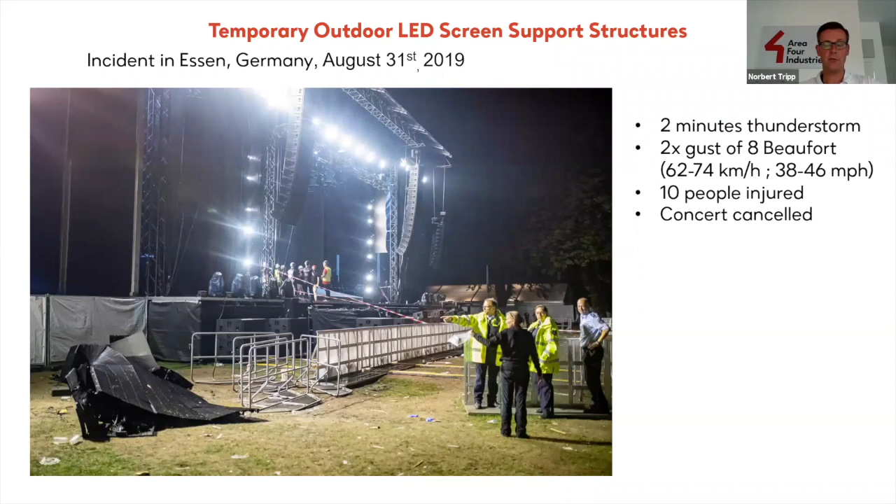So it is an up-to-date topic. What I will present or show or explain is, I will start with a few pictures about common LED screen applications, how usually in our industry LED screens are hung from supporting structures.

Secondly, I will look at the legal basis for design and use of LED screen support structures. Third, there will be some details that should be considered when you hang an LED screen. Then I will compare 2 different support structures taken from manufacturers' catalogs. And finally, I will speak about the behavior of LED screens under wind loads.

There's already the first question coming up here: as part of load calculations on the structure, should the LED screen be rigid to the structure? You can be sure this will be answered somehow, it will be discussed within this presentation. Please let me know later if your question has not been answered correctly.

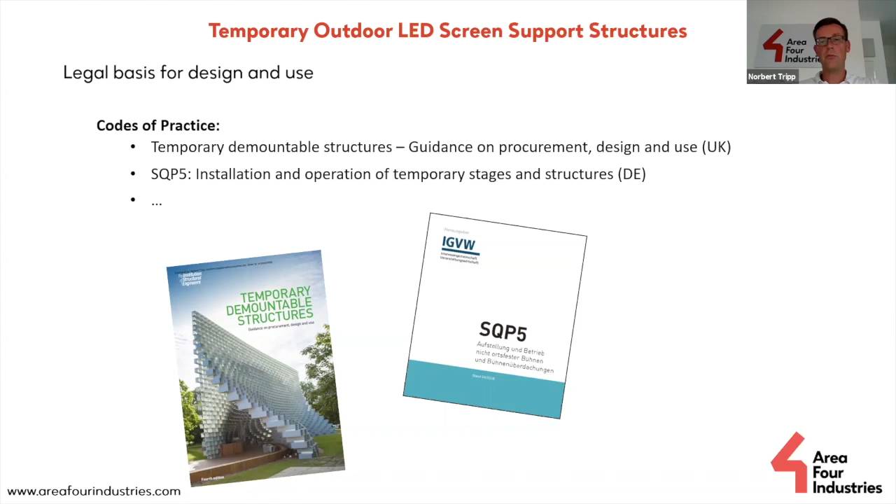The basic question is simply, what do all these rules have in common? What they have in common is that all of them speak about risk assessment or an operational management plan, risk reduction, high wind action plan, or however it's called. Basically, these rules have in common that they describe the obligation to carry out a proper risk assessment during assembly, use, and disassembly.

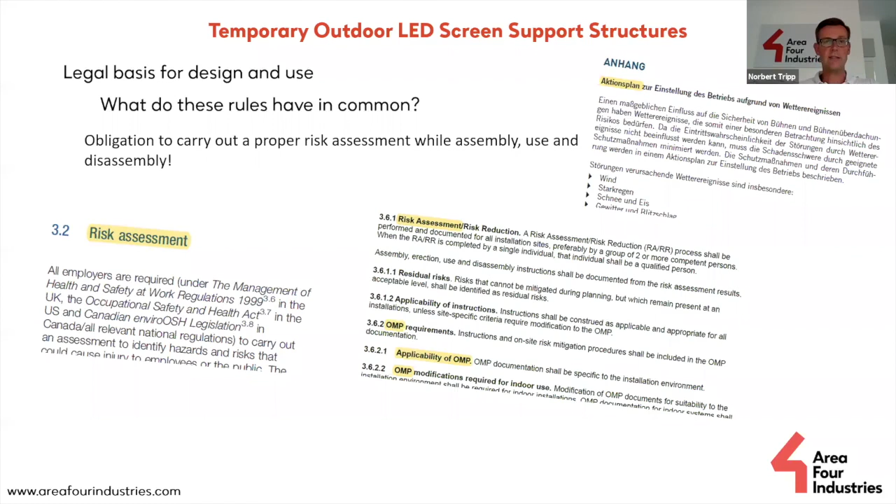And this risk assessment shall be used to create an operational management plan. Okay, it can be called operational management plan, it can be called high wind action plan, it can be called however, but what's important is that this OMP describes what can or should be done, when, how, and by whom in case of expected incidents. And with expected incidents, you can understand strong wind, strong rain, snow, or something similar.

This operational management plan should be prepared preferably by two or more competent persons, or a qualified person. If you want to have a look at who or what is competent or qualified, you can look at the American ANSI E1.21 - there it's nicely described, the difference between qualified and competent.

So the OMP sets out the responsibilities for managing the risks. That means it describes - if there is a forecast for a thunderstorm, what actions can we do? How will we do this? Who decides to start the measures, and who carries out these measures, and in which way?

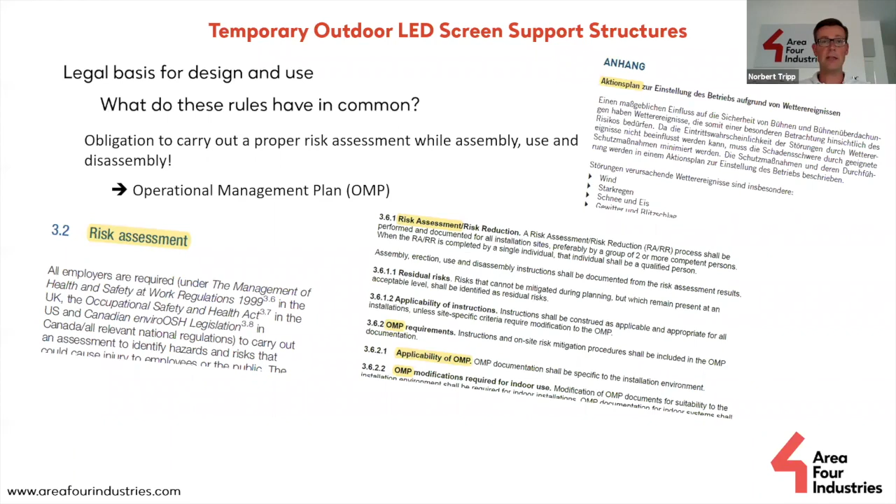Okay, but we do not have only the risk assessment and the operational management plan. Finally, or always, what you should take into account is your common sense. For common sense, I did a short Google search, and you can find thousands of nice pictures that describe common sense.

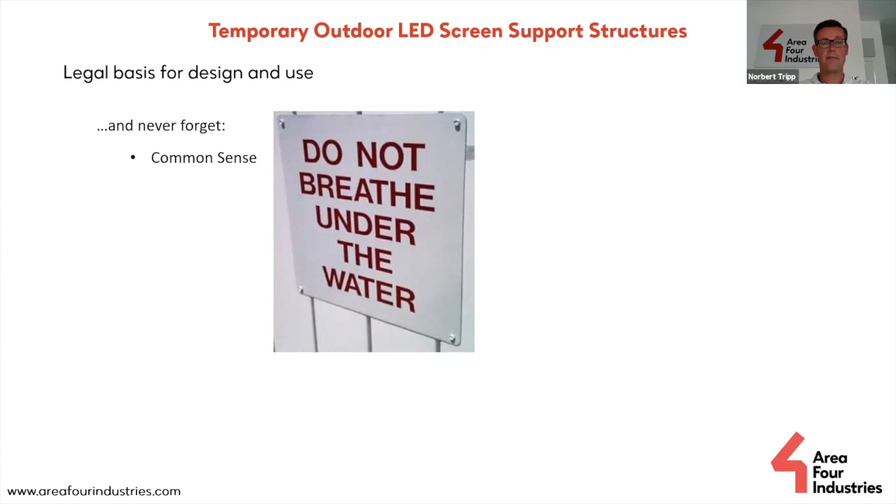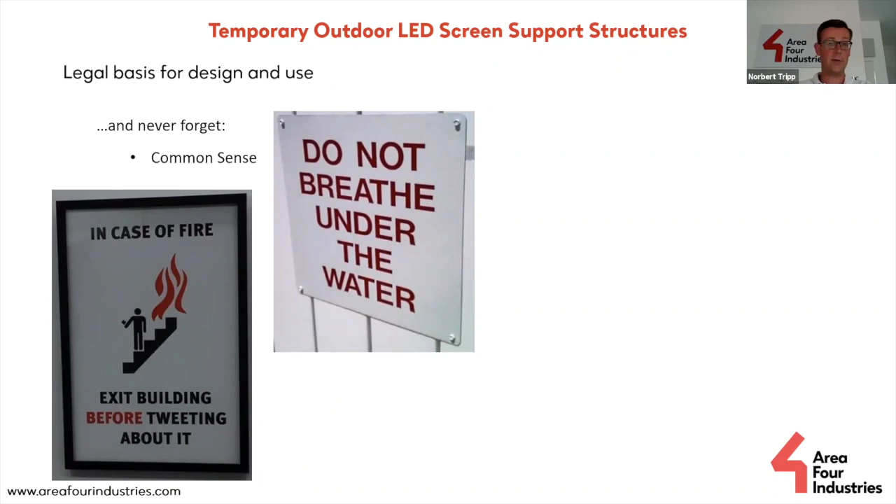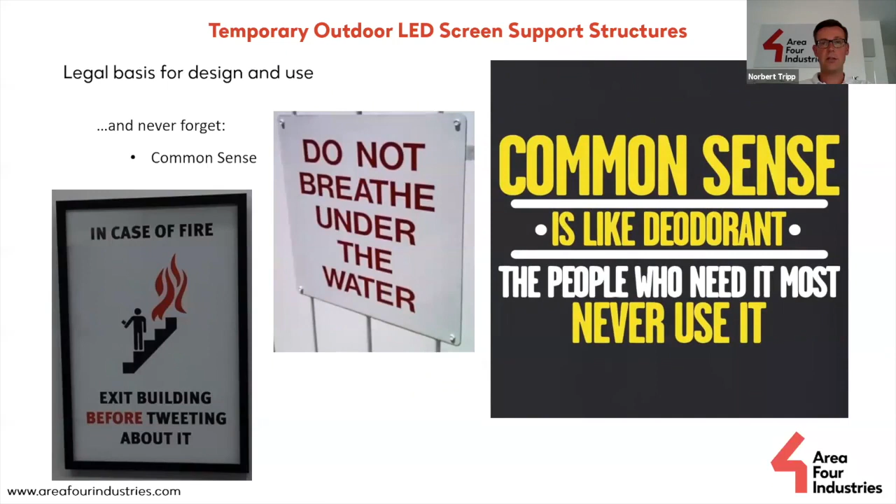My favorites have been these three: of course, in a pool you should not breathe underwater. When you are in a building which is burning, you should first exit the building before tweeting about it. And finally, my favorite one: common sense is like deodorant, the people who need it most never use it. So use your deodorant and use your common sense.

Now let's have a look at the third topic: what you should consider when you hang an LED screen.

Hopefully, the structure you usually build where you hang your screen has been approved somehow by a structural engineer up front. And if you intend to hang your screen on the bottom front main chord, which is the easiest way, you should tell your engineer that you do so.

Otherwise, because this kind of load application is not in the center line, not in the center of gravity of the truss, it is eccentric. So the load is applied with a lever arm to the center of gravity, and a force multiplied with a lever arm results in a bending moment. In this case, it's a torquing moment for the truss.

If you do not inform your structural engineer that you will hang the screen like this, I usually expect that it's hung properly in the center of gravity, and I would not consider any torquing moments or torquing forces on the truss.

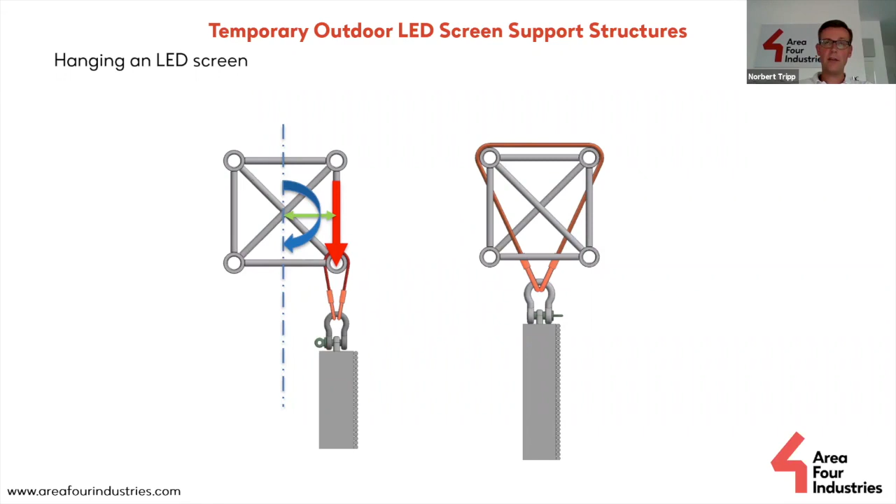And if, for example, the truss already has a utilization close to the limit concerning shear forces, this additional torquing moment will create an additional load on the diagonals, which might cause a failure of the structure. So it's always recommended to hang the screen in the center of gravity, because then you do not have the lever arm, and where there's no lever arm, there's no torquing moment.

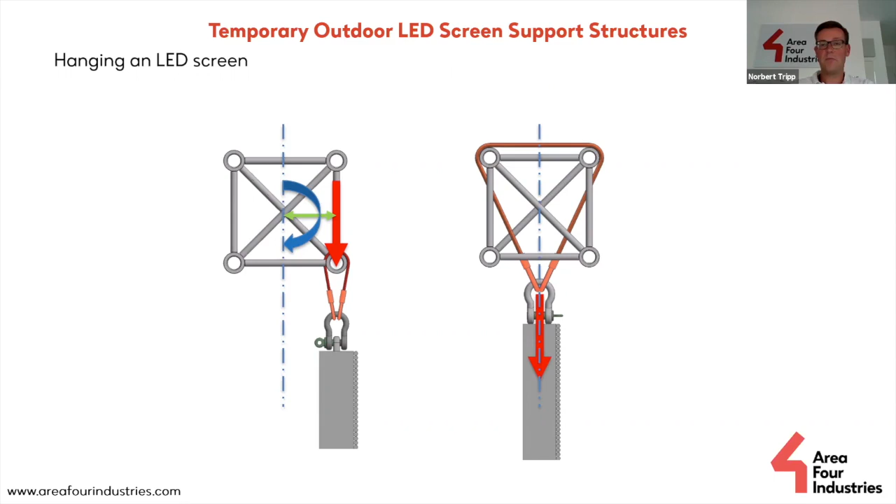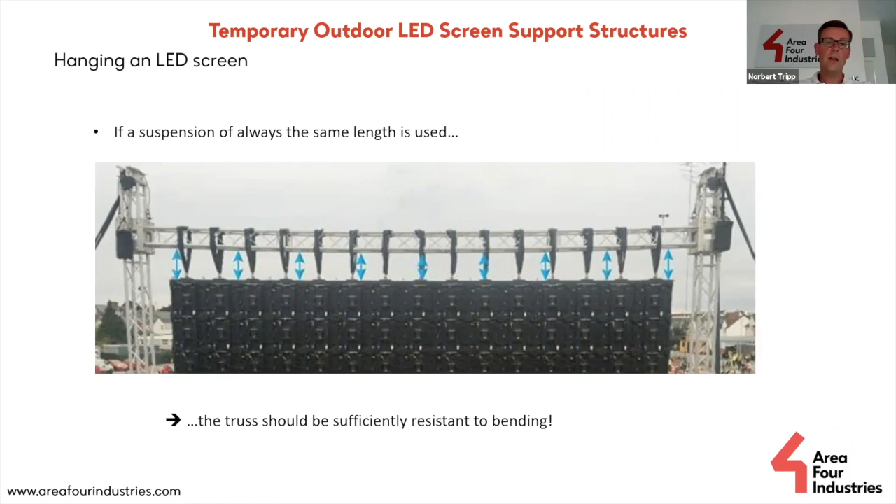On the other hand, if your truss is quite flexible and shows this behavior, then you should use an adjustable suspension. In this case, it has been different electric chain hoists, but here again, if you do not control these chain hoists by use of load cells, you cannot guarantee that the panel-to-panel connections right and left are not loaded too much.

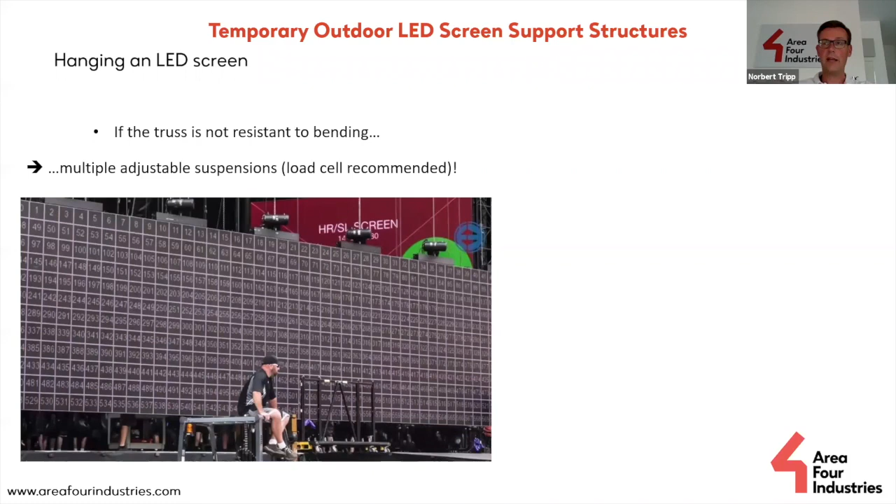Another option is to use an intermediate truss, which is hung on only two hanging points. This picture you have already seen at the very beginning of this webinar.

This intermediate truss is supported by 2 chain hoists, and they are not at the very beginning and the end of the black truss. It is somewhere between the third points to quarter points. This way, you can harmonize the deflection between the hanging points with the deflection on the free cantilever, and this reduces the overall deflection and reduces the stresses on the panel-to-panel connection.

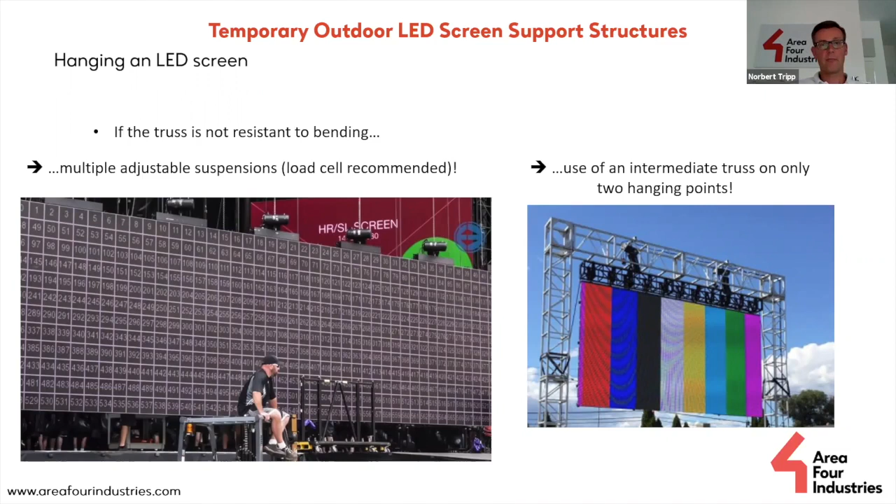Okay. I'm happy not to get any questions on what I've talked about. Otherwise, please just let me know.

Let's have a look at the next topic: when you compare information provided by different manufacturers and compare the load capacities of supporting structures. Here I have 2 different examples. The very first is from the Czech company Milos, the so-called structure LSG3, which you can find in the catalog. The LSG3 is for LED screens 10 by 6 meters in size.

The span is about 11 meters. The overall height is as well around 11 meters. The horizontal top truss is a 1 meter high aluminum truss. The towers are 52 centimeter square trusses. Having a look in the catalog, you can find the information that the load capacity is 3.2 tons or 7,000 pounds, with a small star describing that you can have a look in the structural report, how and where exactly the load shall be introduced in the structure.

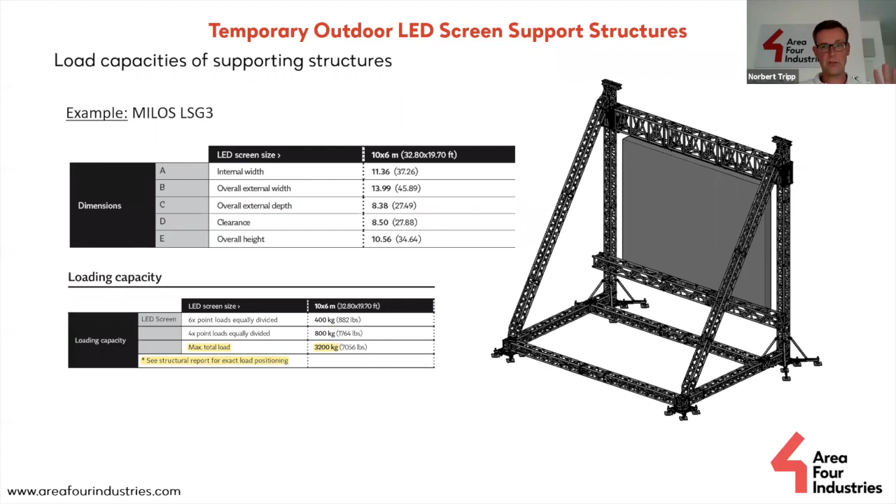So far, so good. Then we can compare this structure with another one from the Italian brand Litec. The description S11H9 describes the height and the span, which is more or less comparable to the Milos structure. And the towers are as well 52 centimeters square. The main truss is RL105, which is comparable to the Milos RTTH. So speaking about the truss dimensions, the structure dimensions, it's absolutely comparable, but the difference is that here the information about the uniformly distributed load shall be in total 6 tons.

Here we had 3.2 tons, and here 6 tons. Why? Where's the difference? You can see here as well, the description of UDL has a small star, which gives a reference to the small print information. And there you can find that the indicative loading data is for use in environments without wind. Of course, when you do not have to consider wind loads, a comparable truss has way more reserves for vertical loads. So if you compare the manufacturer information, you should have a look or ask for all the details to be able to compare apples with apples and not apples with pears.

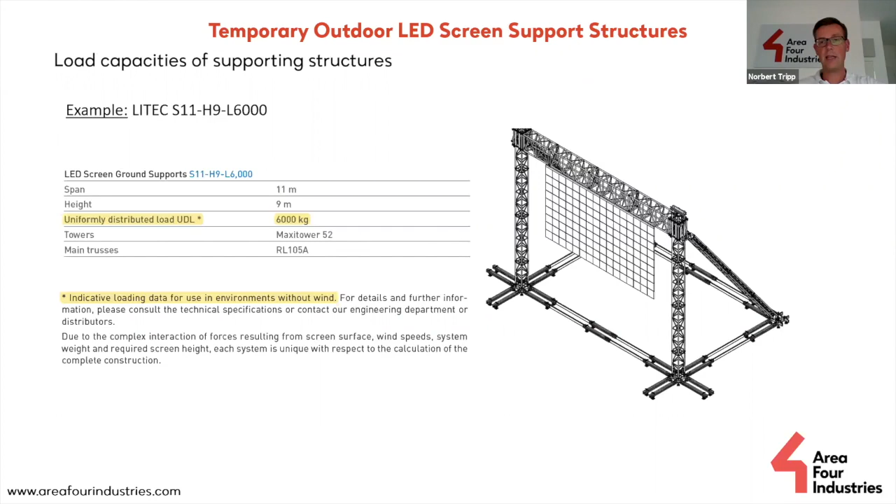Important to mention here is that the airplane creates a nearly constant wind speed. But in reality, natural wind is never constant. It has peaks due to gusts of wind. But first, let's have a look. What does it mean when the screen is swinging on a structure? Of course, it can damage the supporting structure.

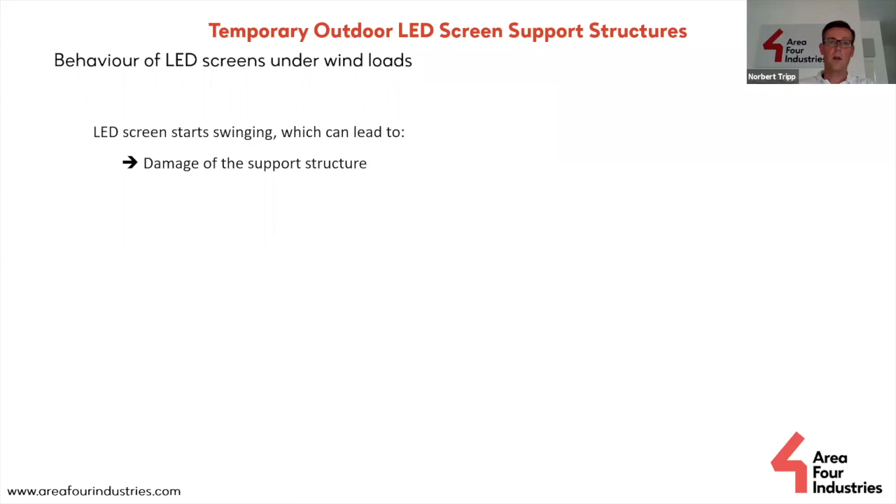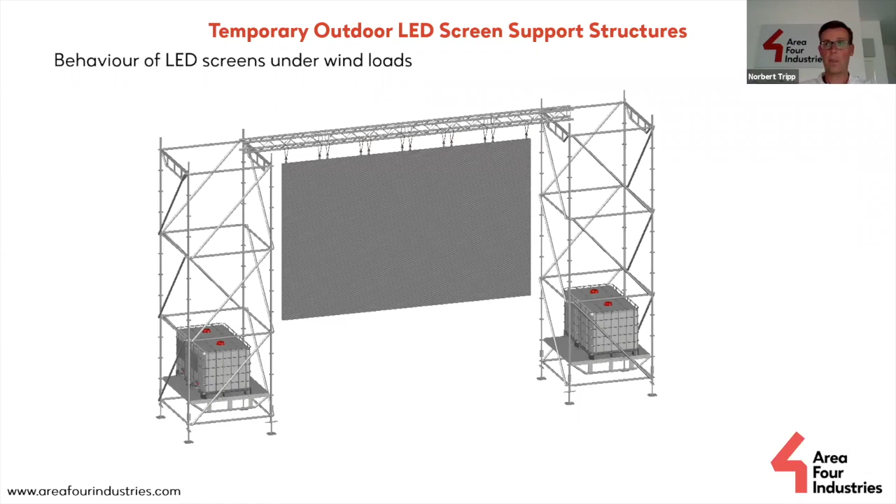Okay, what else happens when the screen is swinging? It changes the center of gravity of the entire structure. Entire structure means in this case the center of gravity of the supporting structure, including the self-weight of the screen. To visualize this, I have created a model, 2 scaffold towers with a cross truss on top from which the screen is hanging. So far, so good, quite easy, quite simple.

Having a look from the side, the center of gravity of the ballast is, in this case, in the center of the structure. The center of gravity of the screen is as well in the center of the structure. When talking about an overturning point on the rear side, when the wind is blowing from the right, what acts against overturning of the entire structure is the load of the screen plus the force of the ballast multiplied with half of the structure's depth. The force multiplied with the cantilever is the bending moment, or a moment. In this case, the self-weight of the screen and the structure, including the ballast, creates a resisting moment.

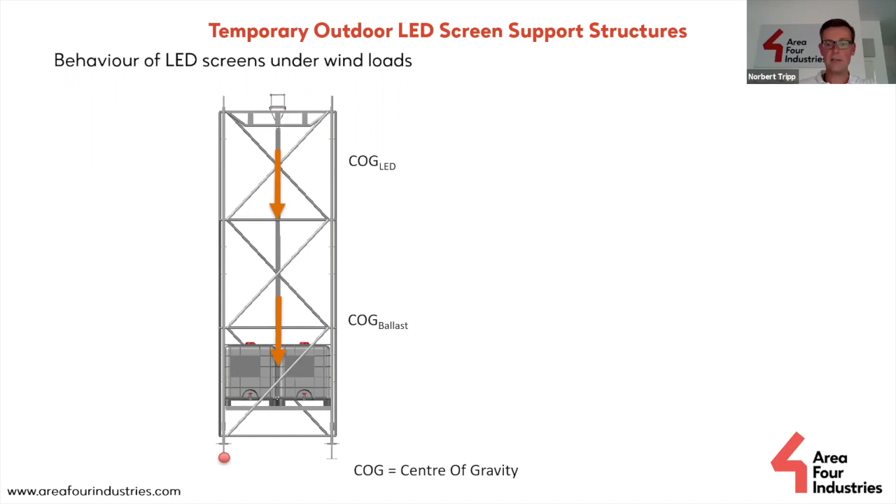When the wind is blowing and the screen is swinging, the center of gravity of the ballast and the scaffold structure do not change position, but the center of gravity of the screen is now exactly vertically over the overturning point, and that means that the self-weight of the screen does not create any resisting moment anymore. That means that the resisting moment is in total smaller. And this can, of course, cause a collapse of the structure.

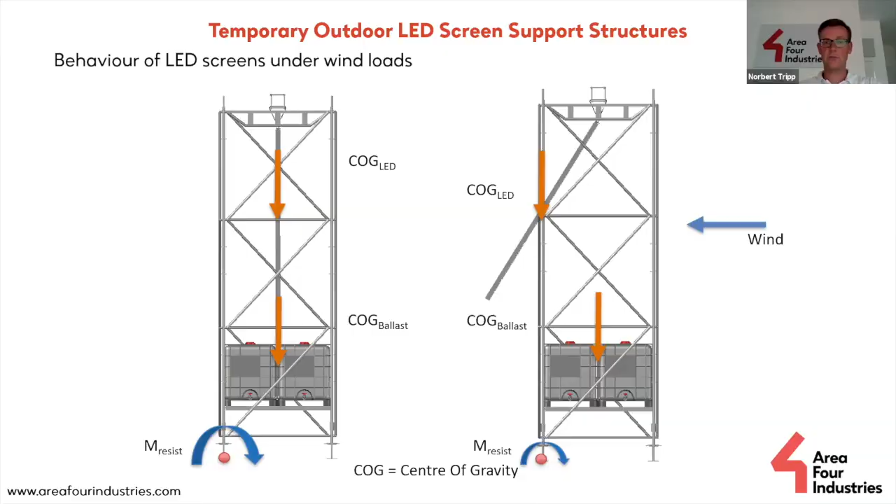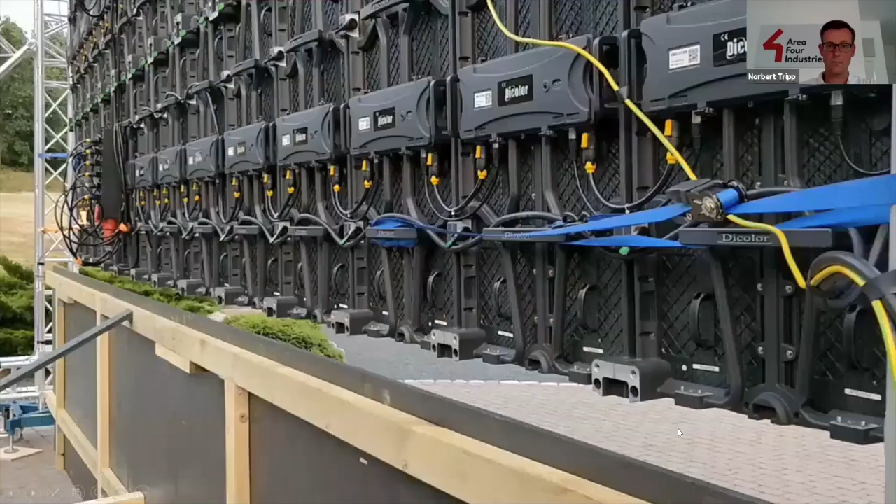Another example: this screen has been attached by these blue ratchet straps, and on the other side the orange ratchet straps, to the vertical towers. Nice idea, theoretically, but then the effect is different. The screen is not swinging in total. Now it is swinging only in the center. That means that the panels are bent.

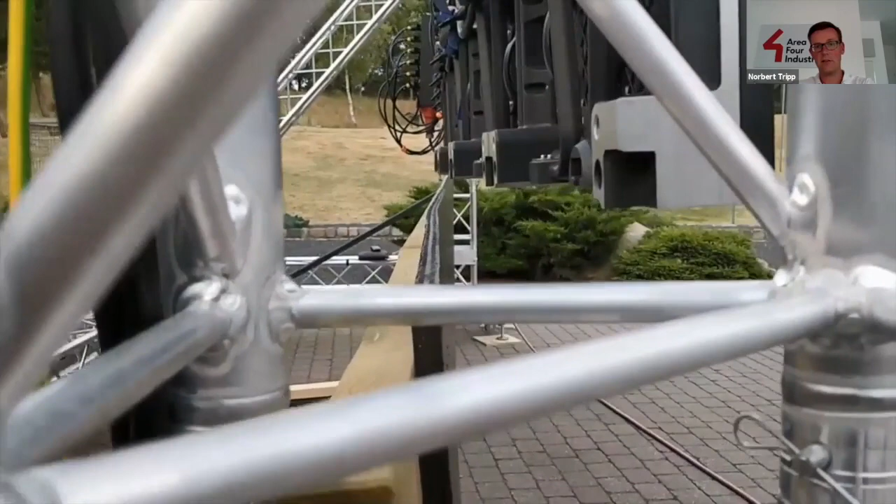15 years ago, LED panels had cabinets with a depth of 15-20 centimeters, which created a certain stiffness against bending. Nowadays, the panels are very thin, mostly made of die-cast plastic. Of course, then they are lightweight, but they do not have a proper stiffness against bending of the panel itself. And when you see this, you might be afraid for the money you have invested in your LED screen.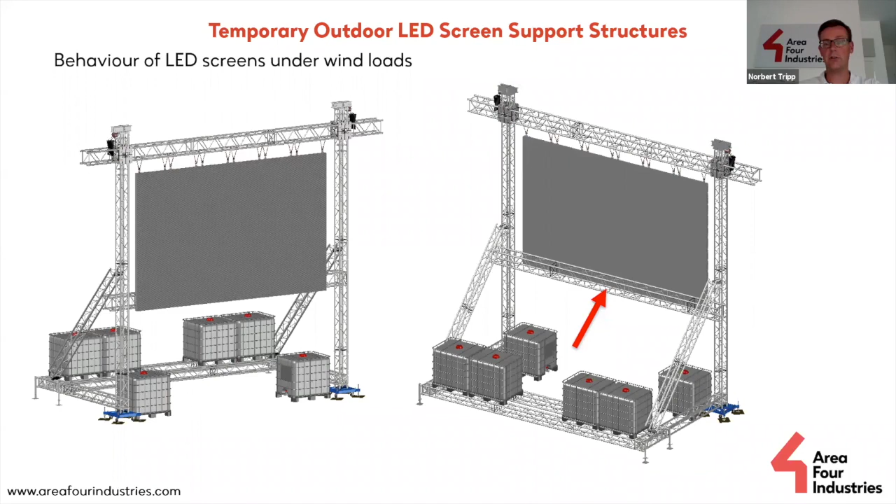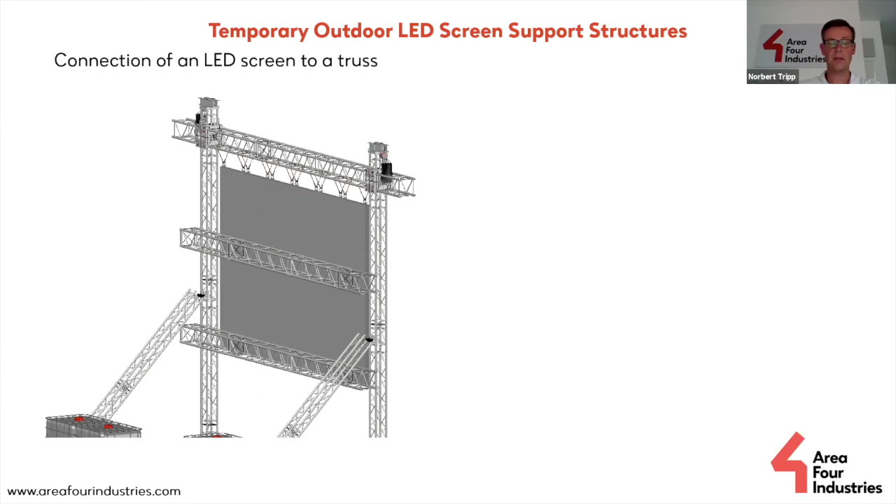Then the next question is how many of these horizontal trusses you need to protect your screen from damages. It depends on the strength of your screen, if only 2 or more horizontal trusses are necessary to take the loads to protect the screen from any damages. How the screen can be connected to the truss depends on what type of truss you have and what type of screen you have, of course.

Most of the screens use these kind of butterfly plates or offer some threads that can be used to connect a coupler or a pipe or whatever. This you have to do by yourself, depending on the combination of truss and screen, and as well on the distance between the screen and the truss.

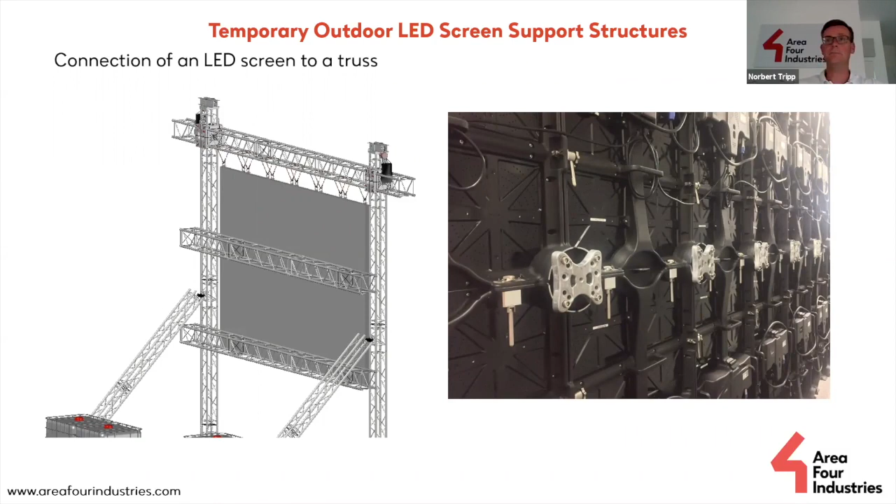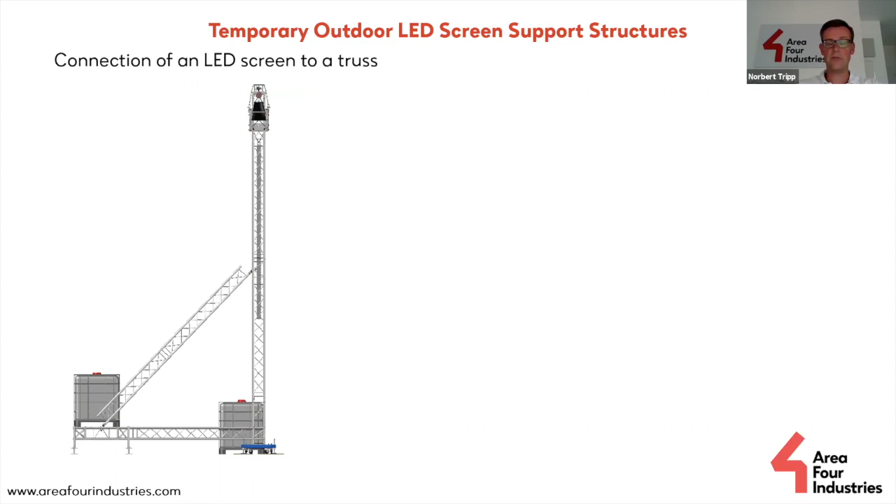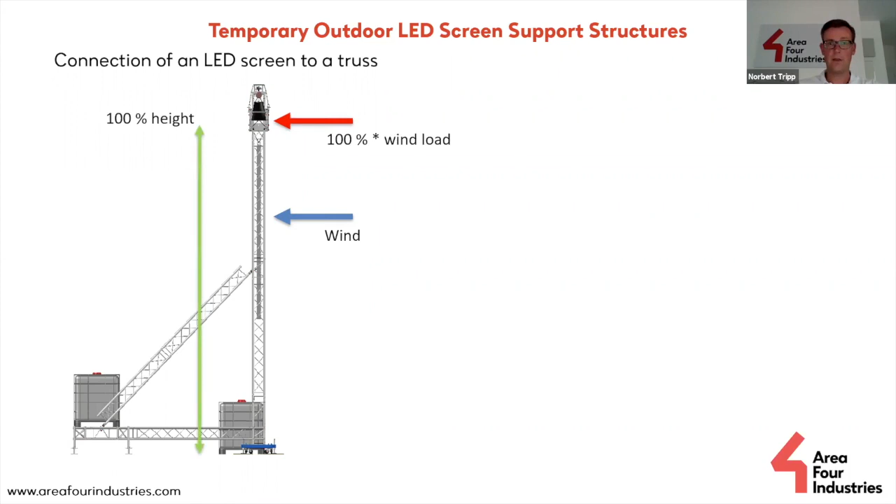One benefit of using these additional horizontal trusses I want to describe right now. When you have the same structure as seen before, the wind is blowing on the front side. In this case, the complete wind load is introduced into the structure on the horizontal top truss, so that means in the top height. And here again, the force multiplied with the lever arm, with the distance in relation to the overturning point, creates an overturning moment.

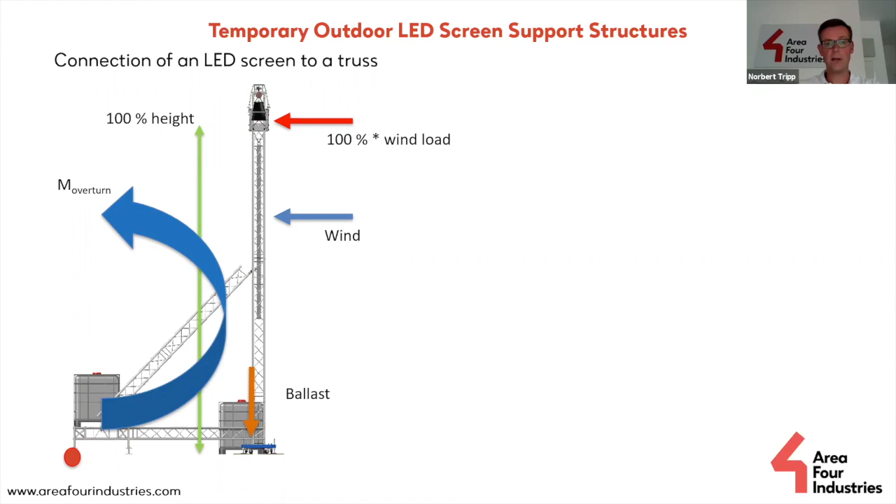What is acting against that is the ballast on the front side and partially the self weight of the structure, of course, but now let's consider only the ballast, multiplied with the horizontal distance to the overturning point, which creates a resisting moment. And as long as your resisting moment is always bigger than your overturning moment, you're safe.

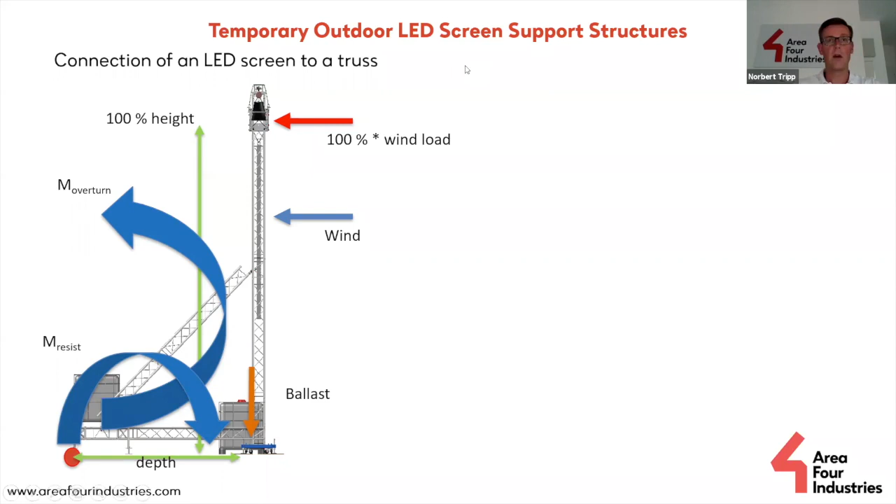What happens when we add this horizontal truss on the bottom edge of the screen? The wind is blowing, the wind is again the same, but only 50% of the wind load is introduced in the structure in the topmost height, and 50% in this example more or less at about 40% of the height. That means that the total overturning moment is way smaller.

On the other hand, the depth is the same, and the required resisting moment is smaller because the overturning moment is smaller. That means finally that you need less ballast. So it has its benefits.

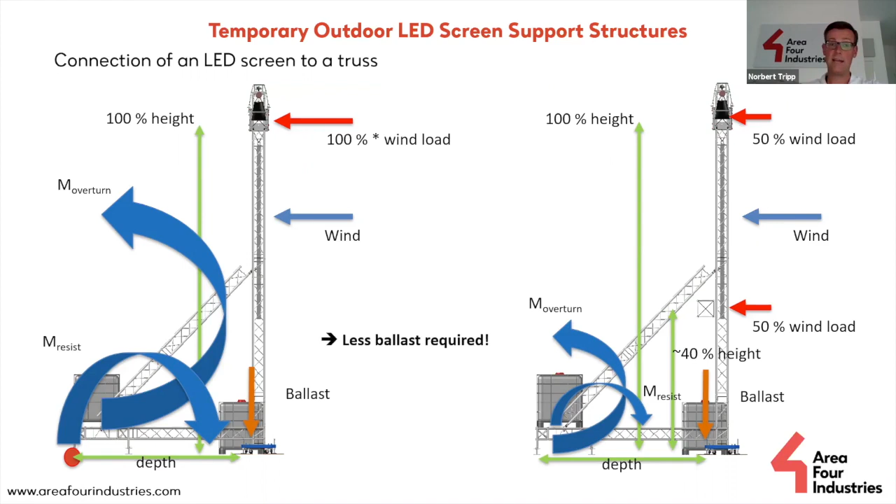Now let's have a look on wind loads that need to be considered. The European standards and as well the American standards describe different setup states, in service and out of service. The condition in service means for a temporary demountable structure that it can be calculated with a reduced wind speed, which is about 40 miles per hour or 64 kilometers per hour, when having a look in the American ANSI code and the Eurocode.

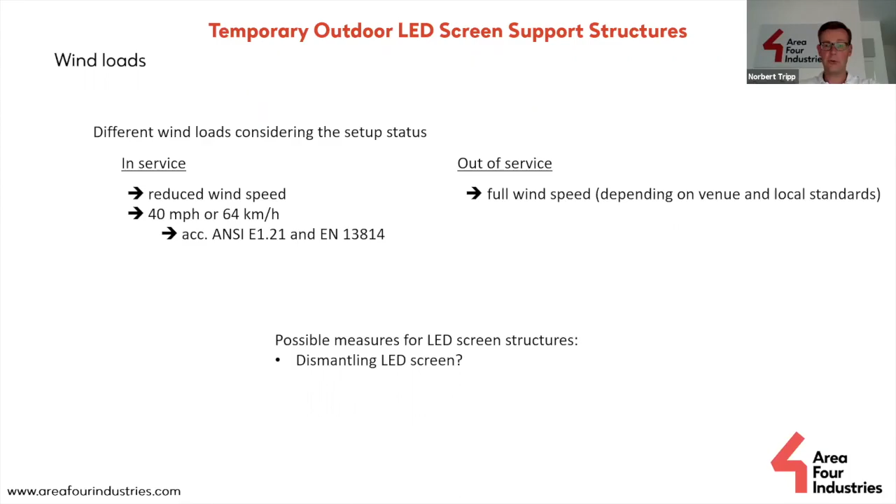For an LED screen structure, it might be an option to dismantle the screen. Dismantling the screen, for me, I think it's debatable if this is a correct and possible measure. Mostly it takes too long and too much manpower. But there is an option to dismantle a screen. You can see in this video.

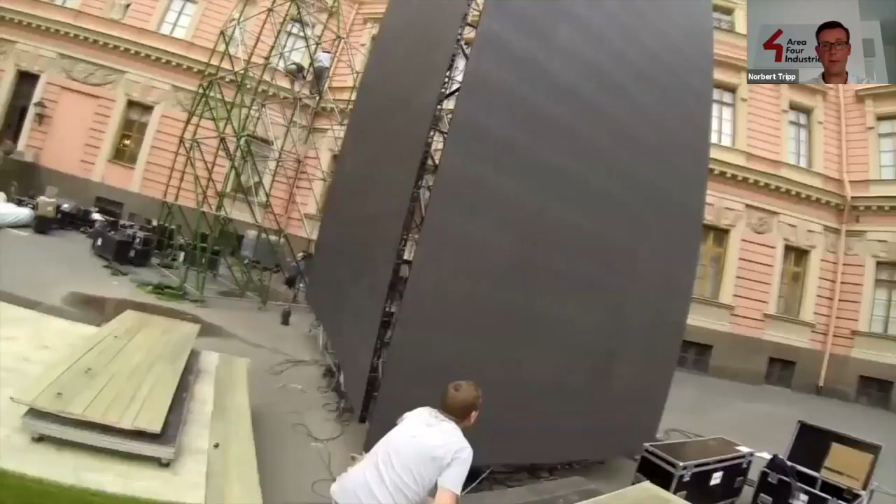You can see on the bottom left of your screen, there's someone at a control box, and he's triggering whatever. I don't know if it's a kabuki system or some chain hoist, but it works really fine. Dismantling is very fast, but he does not look very happy with his solution. So you can decide for yourself if this is the option you want to go.

Another option to strengthen the structure is probably to add guy wires and additional ballast. Or another option is as well that you park your screen on the floor, that you bring it down and let it stand on the floor to reduce the height where the horizontal load is applied to the structure to reduce the overturning moment. But then you always have to ask yourself if your operational management plan is realistic.

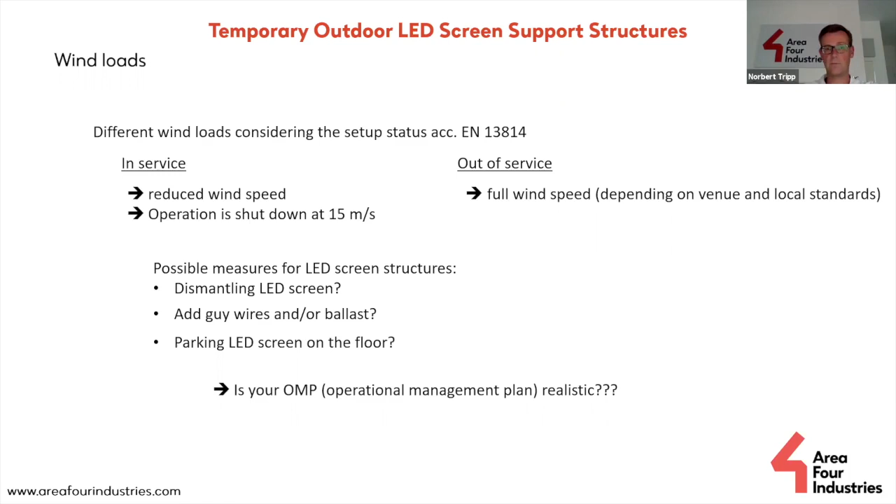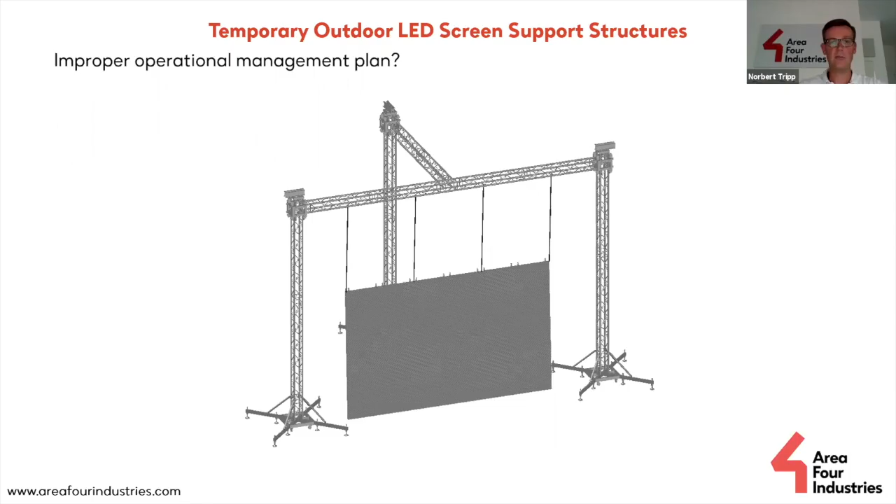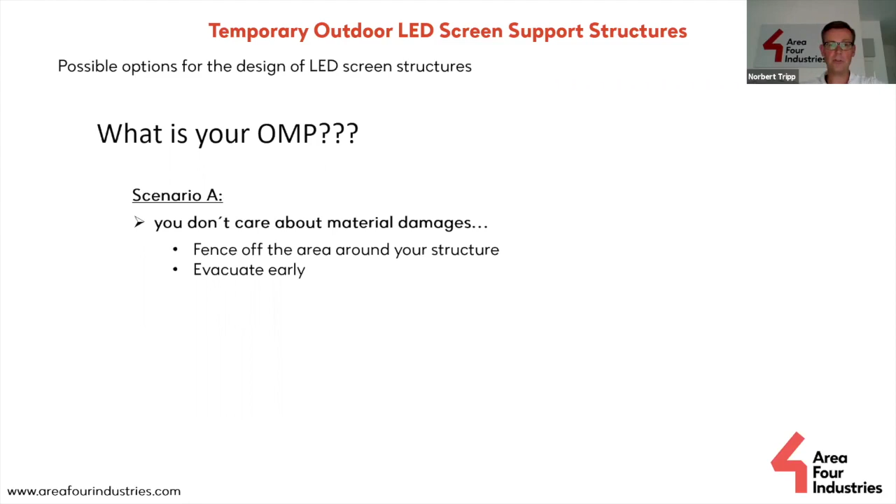I guess most people do not choose this option. The next one would be, the screen is intended to be lowered at a certain wind speed level. That means that you bring your screen down on the floor to change your structure from the in service status to out of service. What does it mean?

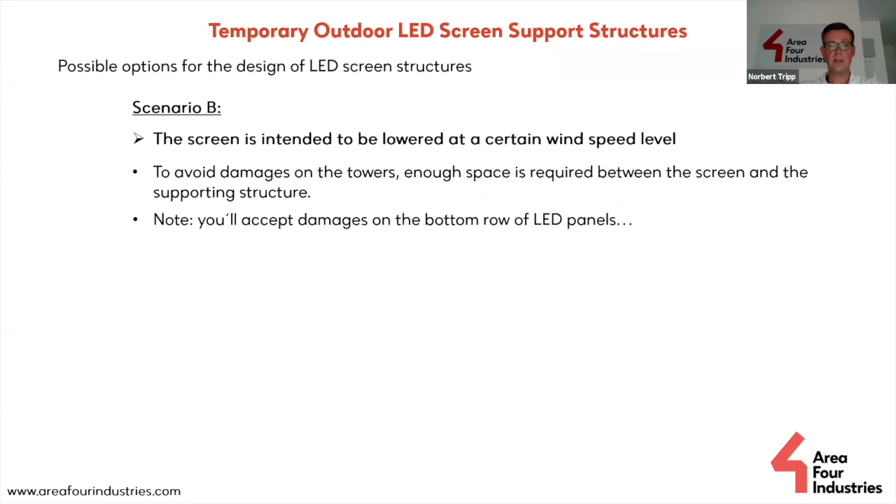First, if you want to, then you need to avoid damages on the towers. That means you need enough space between the screen and the supporting structure, that it does not smash against the supporting structure. When you lower the screen and stand it on the floor, you accept damages on the bottom row of the LED panels, of course.

Therefore, even when it's standing on the floor, you should connect the screen to the structure to avoid the screen tipping over, which can cause the collapse of the whole structure, as we have seen with the example of Birmingham. So the recommendation is that you should add a horizontal truss behind the screen.

And in this, now I have to point out, it doesn't matter if it is a horizontal truss or if it is a vertical truss from the top truss to some fixing points on the floor, that doesn't matter. But it should be connected to the screen. And when it's lowered down, then you should keep it hanging, but connected to this horizontal back truss. Keep it hanging to use the self-weight of the screen to increase the resisting moment.

But then you have to ask yourself, when you want to lower your screen and it's pressed by a frontal wind against the rearward supporting truss, then it's a question if you can lower it anyhow, or if it's scratching along the truss. So here's again the question if this is realistic or not.

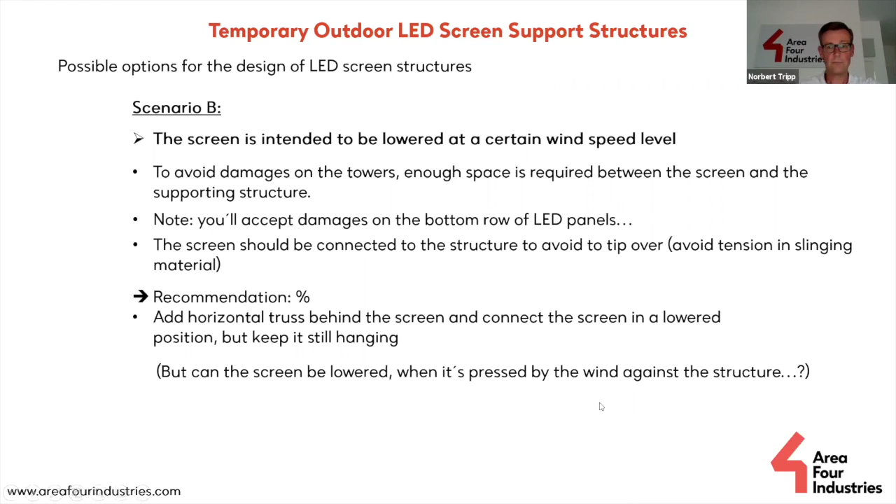Let's have a look on, no, I don't want to have a look yet. I first have to switch on the lights. It's getting dark already here, and I can't see properly what I'm doing.

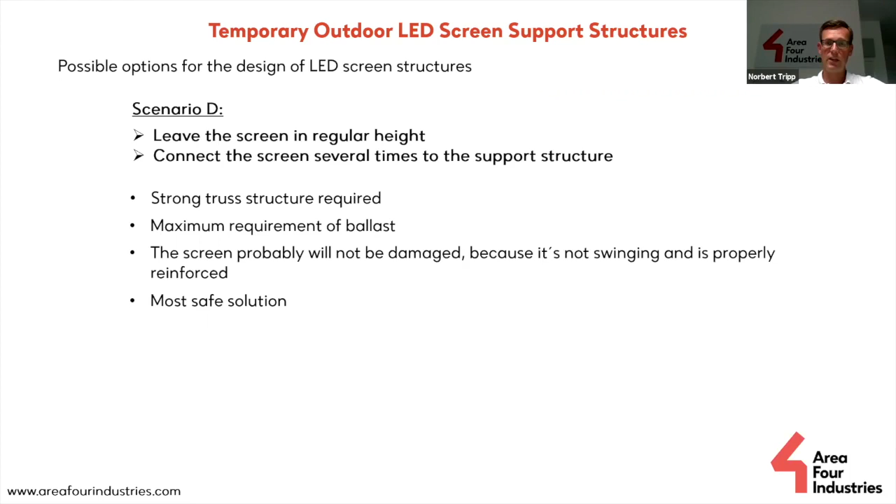I have another video which shows an incident in Ohio in 2012 at the Tattoo Festival, where this structure was hit by a thunderstorm with wind speeds of more than 120 kilometers per hour - that's 12 Beaufort, which equals 75 miles per hour. Let's start the video.

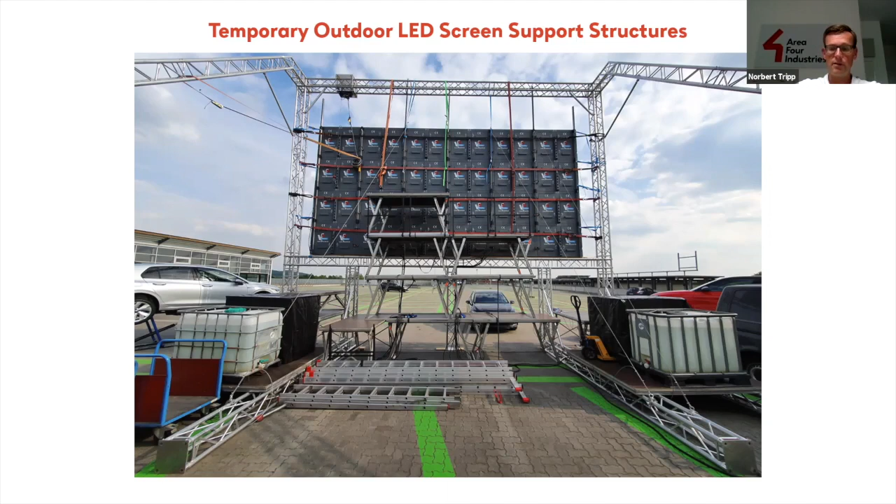And all these ratchets behind the tower in a vertical and horizontal direction should suspend the screen. But as you have seen already, this creates enormous and huge loads for the trusses, especially already when assembling the ratchets. You cannot control how much force you apply with the ratchet - if you do one click more or less, you already create enormous loads to the truss, even without any wind loads.

So the conclusion of this webinar is basically, even if you have a look in the manufacturer's catalog, even if they offer solutions, every LED screen support structure is, from my perspective, unique, because it depends on the venue, it depends on the local standards, in which nation you are, it depends on what equipment you have available. Do you have a cherry picker to assemble or disassemble the structure? Do you have chain hoists available, or do you have only 20 people of manpower available? So you have to decide for yourself.

Go to a manufacturer that offers the components, ask what is realistic, or describe your requirements: how huge and how heavy the screen is, and what is possible or not on the venue, how much space you have, and so on. Then we can support you with a proper design that matches your capabilities. So you have to make your choice according to your needs, capabilities, and possibilities.

Secondly, of course, you need to prepare a proper operational management plan. And having this plan, it's not everything. You must involve, or inform, all involved parties.